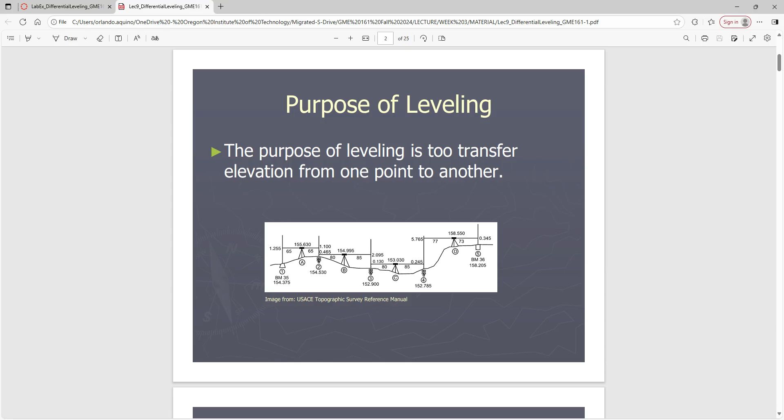Can anybody take a guess why we want to do differential leveling on a construction job? You have to know elevations, right? A good one that we did this past 5 years is we worked on the Kingsley Field Air Force Base. Everybody familiar with the Kingsley Field Air Force Base? So let's go to maps here. We scroll, and again, this is a plan view now, right? Because we're overhead of it.

You guys see all this concrete that's sitting there where the jets are? We had to replace all that concrete starting back in 2019. We did the survey back in 2018, and then we had it engineered. They went through the design process, and they said, all right, we've got to demo all this concrete starting down here. Take this part out, this part, that part too, and we have to replace it with new concrete.

And the tolerance for all that concrete is 1/2 inch. The whole thing. Thousands of feet, you get 1/2 inch vertical tolerance. So what's the best thing to do? Well, when we establish benchmarks all around the perimeter of this thing, we have to know that our horizontal is good, right? But we also have to know that vertical is even better, because they're really going to watch that vertical.

We're going to make sure that those elevations are meeting specifications, so that way there's no issues with drainage, no issue with concrete being wrong, with the elevation being in different grade breaks, having those type of issues, right? So again, this was that project we started back in 2018, and we just finished it June of this

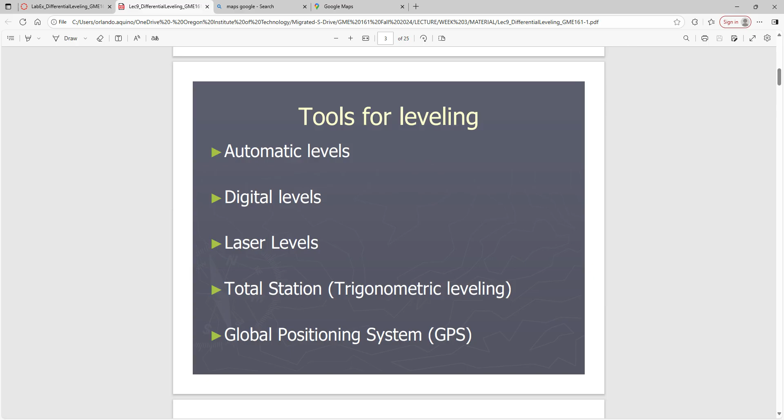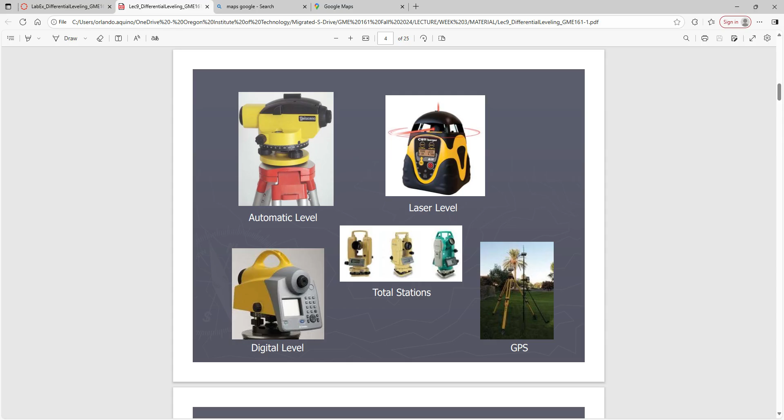So again, these are the examples. On the top left, that's the automatic level, which is something similar that you'll be using. We have these little top guns that you guys will be using for the term. And then we have these GPS. I think we have a different style now, but we have these GPS down here available for you guys. And this one here is what we have in our office, this digital level that we use for that Kingsley Field base job. So those are the different types of examples.

Okay. So the basic leveling procedure with the automatic level, which is what we're going to be using today: the general construction of the instrument, procedure for the setup and transportation, balancing what we call the front sight, but I say foresight, and back sight, reading the rod, keeping the notes, calculating the closure and accuracy, and then the curvature and refraction. We won't worry about the curvature and refraction today. That would probably be taught in a theory lecture.

That has to do more with extreme distances, because I think anything past 500 to 600 feet is where you have to deal with curvature and refraction. If you guys are flat earthers, I'm sorry, but that doesn't really exist. You guys just take it.

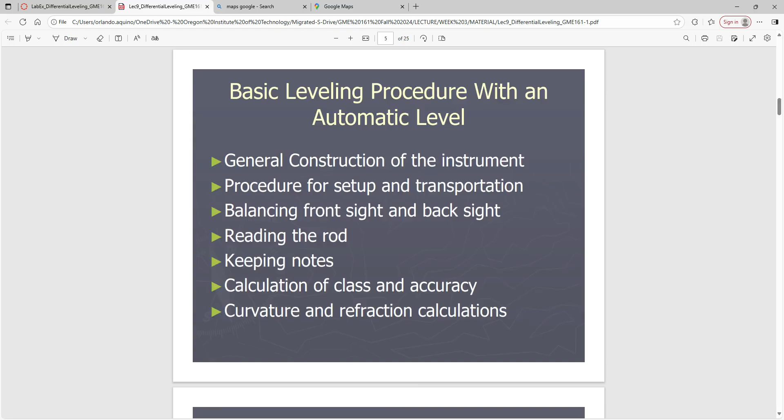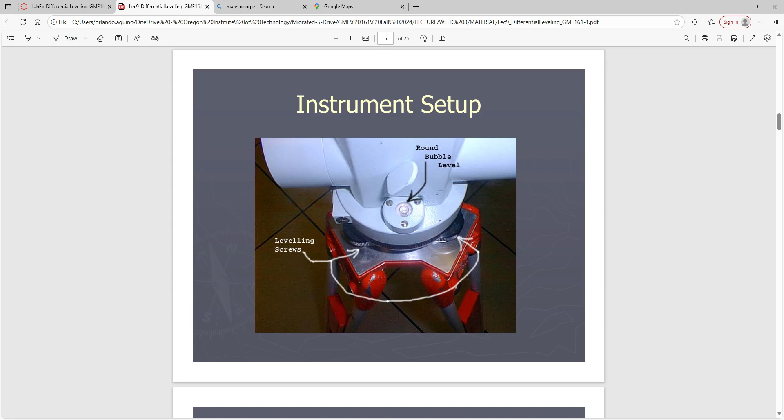So to set up the instrument, we have the leveling screws. Okay, that's these little black knobs that you see right there. Then you have what we call the round bubble level. That's how you're going to make sure that thing is leveled up. And again, we're going to walk through it all here in about 30-40 minutes.

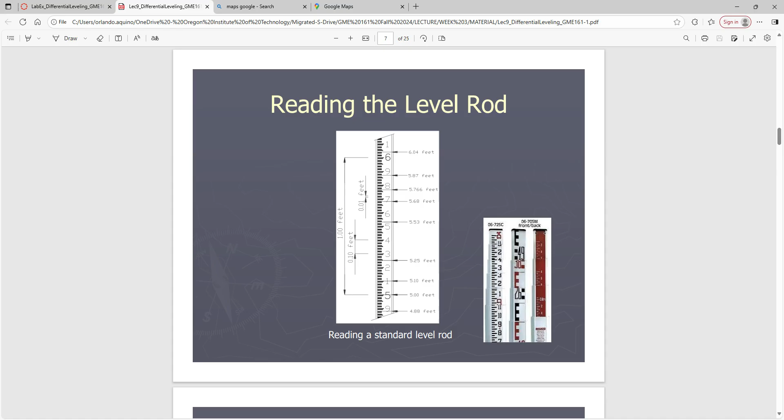Reading the rod level. This on the bottom right, that's going to be what you're going to be using. It's just this big fiberglass rod that you extend, and it can extend up to 25 feet in the air. We're not going to use it that high; we don't need to. Usually just go up one, it clicks in, and you're fine. But if you read it, you look at it. I'm going to try to zoom in here. I'll give you a better view of this thing because it's really

tight. Okay, let me go down here so we can see the foot marker as well. So we have these little black thick marks, and these are all measured in tenths of a foot. Did you guys already establish that from the beginning? We don't do inches here. Everything is in tenths of feet. We don't do 5/8, 3/8. We don't do any of that.

We do 0.1, 0.15, everything like that, because it's easy across the board just to add and subtract those numbers, right? It's a tenth of a foot. I don't know why carpenters and all those guys still use inches, but they just enjoy torturing themselves with fractions. Well, you can easily do a third of a foot. Right. It's just one of those things we constantly have to deal with with a carpenter, and we always have to convert it quickly in our head and go back and forth, and it gets really easy.

So anyways, we're going to be using these rods. And these rods stand about 5 feet to 5.5 feet without having to extend it. Okay. So what we do is we use the automatic level and we use this rod. And the rod is how we establish these elevations. When you're looking through the scope of an automatic level, you've seen the crosshairs. The crosshairs will usually line up on one of these tick marks.

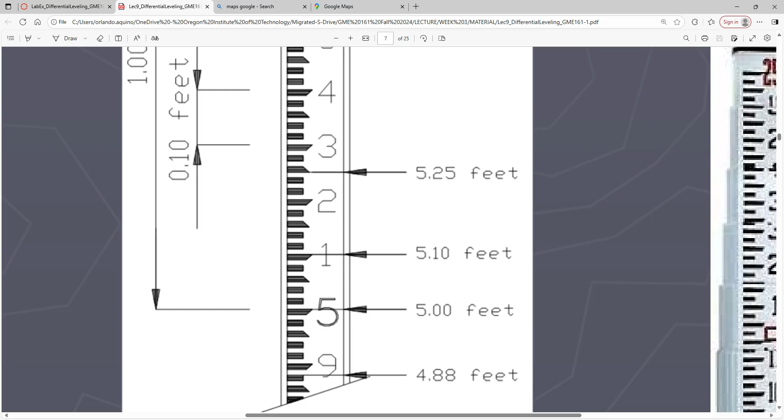And the way we read it is the big fat one, I think it's in red, is the foot marker. So we have 5 foot, right? And the way we establish whether it's 5.0 or 5.1 or 5.25 is by looking at the next set of numbers. So we have the foot marker, then we have the tenths right here, and in between we have the hundredths. And how do we establish what is what on the hundredths? Well, here at the top of this tick mark, on this little spot, that's 5 foot even. The next tick mark up, that's 5.01.

This guy here. Wow, doesn't write. No, I can't write. Cool.

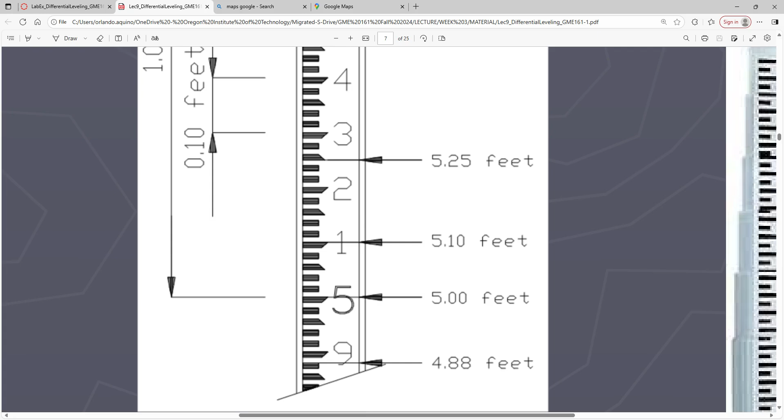So that's going to be 5.01. The easiest way to know that is the bottom tick marks are going to be odd. The top tick marks are going to be even. That makes sense? So we count it. We go 5.01, 02, 03, 04, 05, 06, 07, 08, 09, 0.1. Right? That's how we establish it.

And if you go up here, another example, I don't know how you can do 5.766 because that's pretty crazy. To the naked eye, you can't do that. But another example would be if your crosshairs just fell in between, like this number. Well, I would just say that's 5.75. That makes sense? 5.755 instead of this 5.766. Nobody can do that to the naked eye.

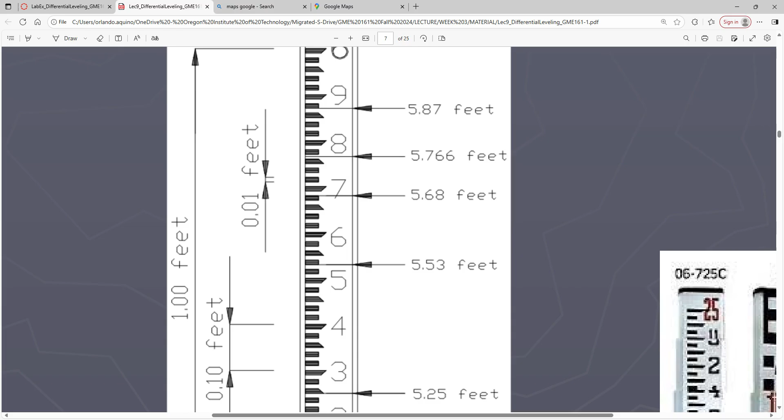When you're out there reading the rod, and the rod is 200 feet plus away from you, and you're trying to read it through this small scope, you're not going to be able to establish that it's 5.766, the thousandths, with the naked eye. If you're in between 2 tick marks, you know that it's 5.7, and then you can't decide if it's 5.76 or 5.75. Just go 5.755, split the difference. Make sense? Go to the thousandths on that. All right. So that's how we read the standard level.

The other portion of this standard level is when your rod man, the person holding that rod, is standing there holding it on the benchmark. What they're doing is what we call a slow wave. They're holding it there and slowly rocking it back and forth. You don't have to do it the whole time, just while your instrument person is reading the rod, you're doing this slow wave back and forth.

And the reason is because you're going to see the crosshairs hit the lowest point at some portion as the rod is waving. It's hitting the lowest point of that rod, and that's the reading that you want to take. Does that make sense? The other portion that you need to understand, let me just get the paint out here.

The other portion that you understand is when you're looking at this through the crosshairs, so let's say this circle is the scope. You're going to have your crosshairs coming through here, right? There's your main. You're going to have a top, and you're also going to have a bottom line. Those top and bottom lines are for what we call a 3-wire leveling. They're not for this class.

So you just have to pay attention that you're not looking at this top crosshair or this bottom crosshair, and that you're looking at that main crosshair. That makes sense? So again, you're going to be looking through there, and you're going to be seeing this crosshair, and as the rod man is waving that rod back and forth, you're going to be seeing where that crosshair gets the lowest reading on that rod.

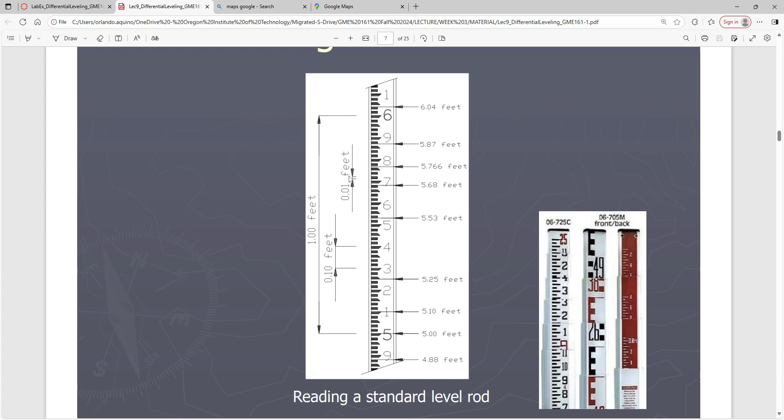Okay? And again, it's kind of hard to visualize now, but when you actually see it in the field, you go, oh, okay, that's what he's talking about. So that's kind of the general idea of what we're going to be looking through when we're looking at that scope. Yeah? And you read the lowest, right? Because that's when it's level. Yeah, that's where it's level. Correct. All right.

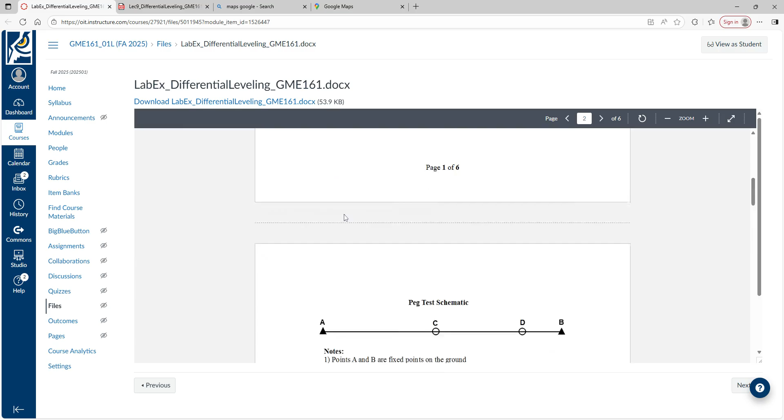So the confusing way of how we set these up. So this is somewhat of a good example of how we keep our notes. So if you look at the differential leveling module or the lab itself, I gave you guys just a sheet that we started with, and we're going to be using this sheet to fill in all the information.

This other note form was from back before, I think we changed the lab style back in like 2021, somewhere around there. We used to have, everybody had their own individual field book, and this is how we would keep our notes in the field book, right? Today, especially because there's so many engineers, we just give you guys the handout. You guys just do it, upload it, and be done.

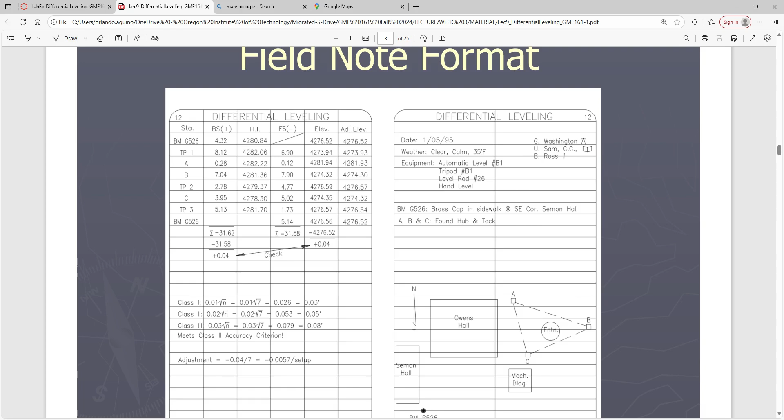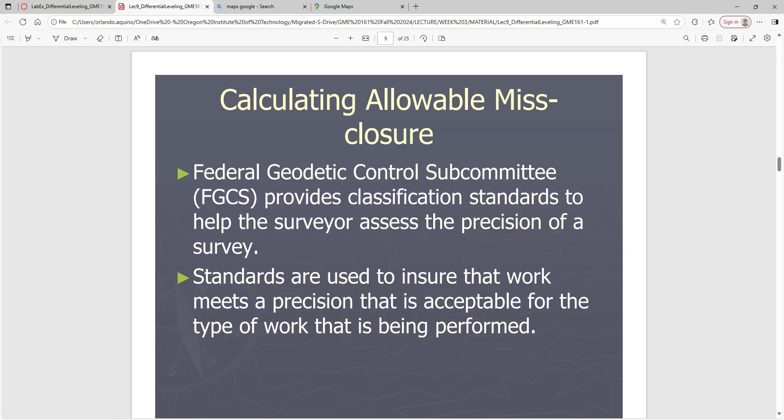So let's see, misclosures. So misclosures, I'm going to leave that to be in lecture today. I'm just going to go over what we're looking for. Okay. So again, there's these federal geodetic standards, but there's also these other standards that we're going to be using that are just not as high as the Federal Geodetic Control Subcommittee, but they're within tolerance. Okay. So this is what we're going to be using.

This is what we call class 1, class 2, or class 3. Okay. So the minimum that we need to fall under is class 3. Class 3 is where 99% of you will fall, right? If something went wrong with just one reading or you missed 2 readings, you're still within that variance of being able to fall under class 3.

Class 1 is everything went smooth, everything was awesome. You guys read every single point, you had every single reading on point, no mistakes, no screw ups, and you guys just came and closed, and you were 0, right? You started with the known elevation, you came back, you established all the elevations.

You went back to the starting one, and you were 0 the entire way. That's class 1, right? You're perfect. So close the level loop on the benchmark and check the closure of the loop. The level loop should be closed within 0.03.

So that's class 3, 0.03 times the square root of n, where n is the number of setups in the level loop. Again, how many times did you set up your instrument, right? So if you set up your instrument 4 times, that's the square root of 4 times class 3 minimum, see if you meet that. So that's 0.03 times the square root of 4. Make sense? And what would that be?

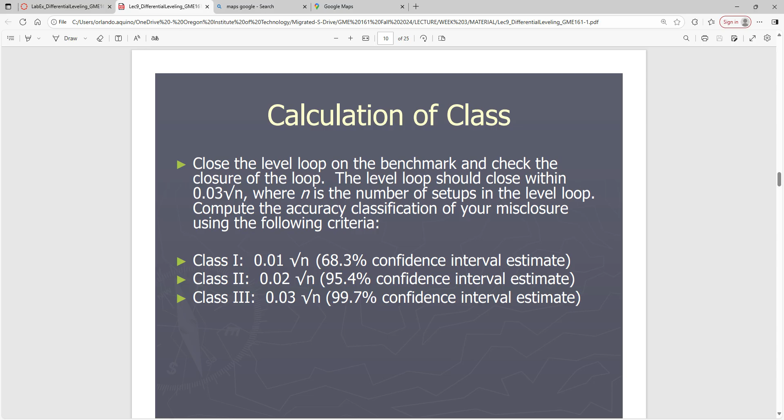0.06. Right. So again, you would have to make sure your misclosure is at 0.06 or under, less than 0.06. That make sense? Okay. All right. So elevations, datum stuff. Let's skip that for now.

That is an established benchmark that is accepted by the National Geodetic Survey nationally, that we established quite some time ago. And so we have a known benchmark elevation, and that's what we're going to be coming off of. We're going to be coming off of benchmark Ager, you're already given the known elevation, then you're going to establish the other elevations around campus, and then you're going to come back and close on benchmark Ager. Okay?

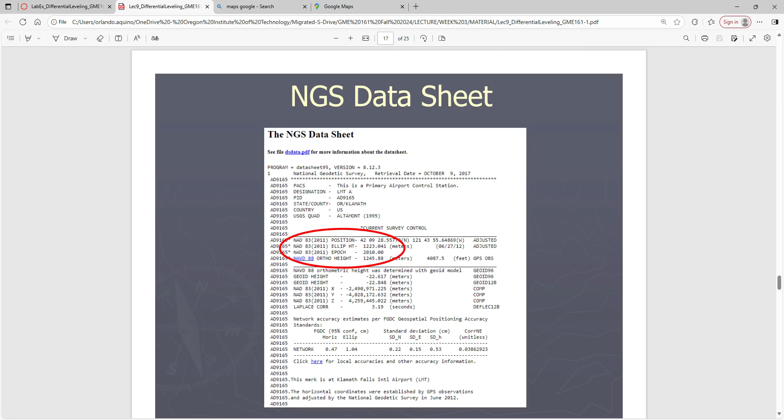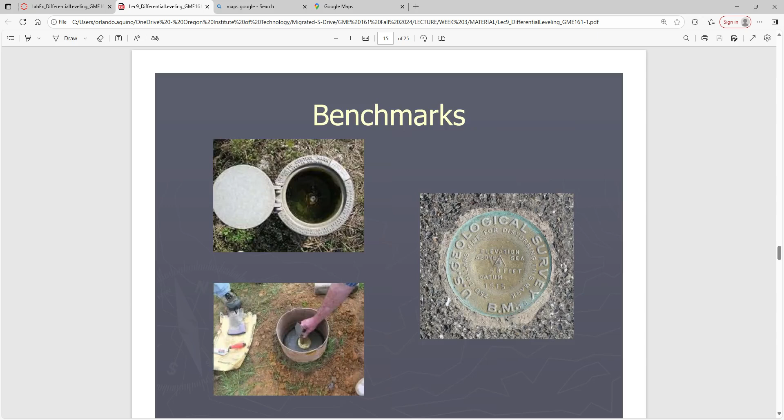Okay, so this group went out. They used this benchmark with this known elevation, and then they established what we call the backsights and what we call the foresights. So let's go over those real quick, and let's just clear this thing. Let's go file, new. Don't save. Okay. So let's say we have, I'm going to erase for you, right? Okay. So we have Owens Hall here, right? We have benchmark Acre right here.

And you guys can establish these. We're going to be using those little hubs that we set last time. That's how we're going to be establishing our elevations. You can go around, establish those hubs. And let's say we've got to establish at least 4 of them. Let's call them A, B, C, and D. And let's go clockwise. Okay.

So we've got A here. We have B there. We have C here. We have D. And then we're going to come back to Acre from there. So we're going to go from Acre to A, then to B, then to C, then to D, and then we're going to close back on Acre. Okay. So just by looking at it, we're going to have to go.